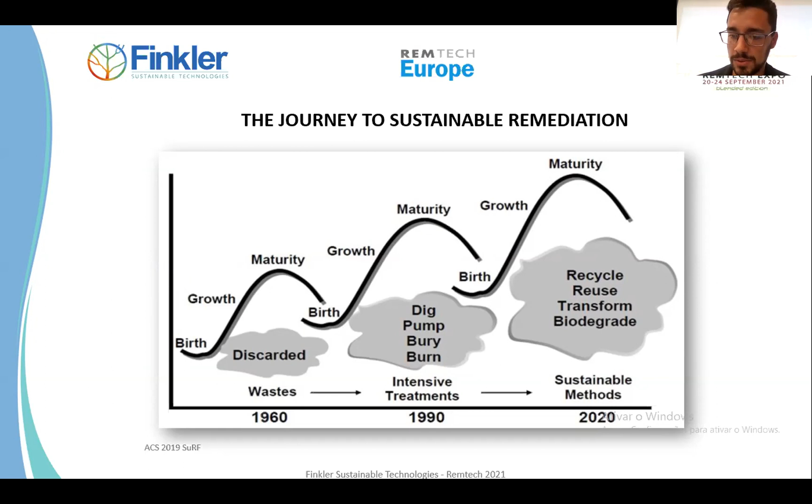Then we started by digging, pumping, burying, and although we would actually eliminate the contamination, we realized that the waste of energy use and the emissions of greenhouse gases were too much. So we had to develop sustainable methods, meaning applying more recycling, reuse, transforming, and biodegrading to the remediation.

So how is it applied nowadays? We have ISO 18504 from 2017, we have SURF from UK, US, Australia, New Zealand, Nicole. But what do all those guides, metrics, and methodologies have in common? They all say that in order to achieve sustainable remediation, you must consider three aspects: the economic, the environmental, and the social one.

Here's an example from SURF UK, where we have many parameters to be evaluated. If we take the first one, air emissions, we can apply a quantitative metric, the CO2 emissions. In the first economic one, we can actually see the value, the money, so the direct economic costs. Those are two examples of quantitative metrics applied to sustainability.

But in general, what all the guides and methodologies have is that they say we should have a subjective and qualitative approach to the project. That's because each project has its own characteristics, each site has its own perspectives, each country has its own legislations, each client has its own needs. So you're not able to apply a fixed rule to every project. In each case, the people responsible for the project should select the metrics and factors that are applicable to that case.

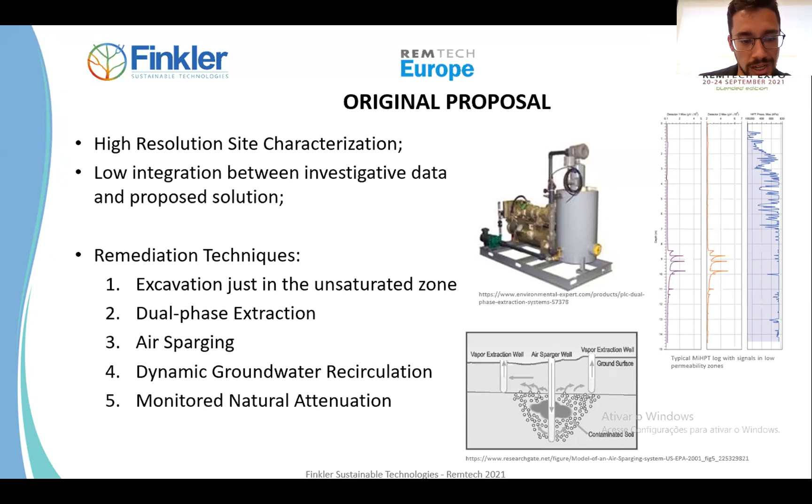Here is our approach to the problem. We decided to intensify the high resolution technology investigation. Through that, we were able to better identify the center of mass of the contamination, and by some estimates, we realized that around 98% of the mass of contaminant was located in the center of the mass. Therefore, if we focus our excavation on these spots, we're going to excavate less than if we only focused on the unsaturated zone.

So by excavating both the unsaturated and saturated zone, but with the knowledge of the exact location and how this contamination is distributed, we're going to remove a higher amount of contamination, and this way we're going to end the secondary source of contamination.

Our second stage is to promote biostimulation with soil mixing and chemical oxidation in order to deal with this 2% of contamination that is left. Since we don't have a second source of contamination that is always feeding this rest of contamination, we're not going to increase the amount—we're always diminishing the amount of contaminant in the soil. In addition, we're going to use a biopile to remediate the excavated soil.

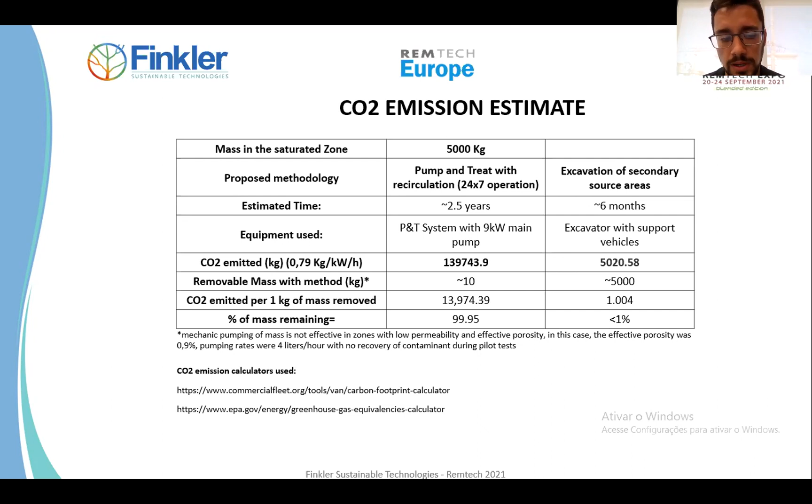When we bring this to the reality of sustainable management and the approaches the guides propose, we can easily sustain that it is not possible to manage if you're not completely sure how your contamination is distributed, how your soil will determine the distribution and movement of this mass. So the data must be all connected and interpreted in order to better evaluate the best approach.

As this case study shows, the most intrusive methods might not be the ones with the biggest impact. That's because if you consider the entire life cycle of the project, the effectiveness of the remediation is way higher even if you emit CO2, in some cases a high quantity of CO2 in just a short period of time. Because if you take the long term, the estimation of 2.5 years is definitely not going to happen—it will be 15 years, or maybe 100, and the total CO2 emission would go really high.

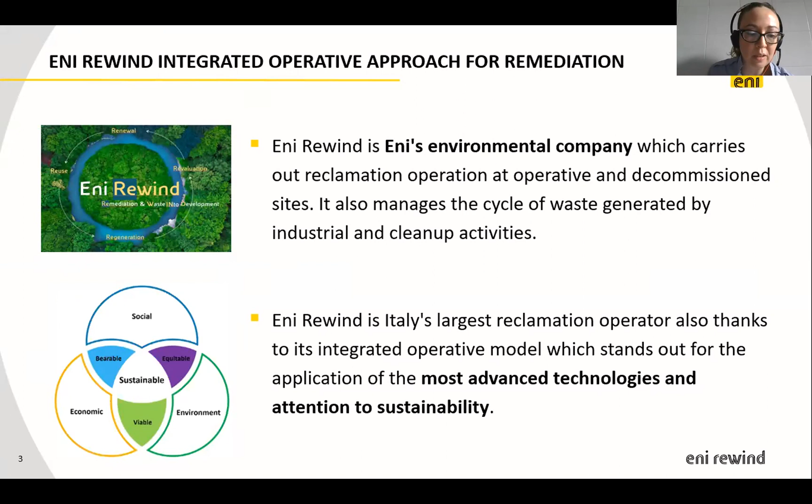About the comparative study, the scope was benchmarking the regulatory and technical approach to identify international best practice in order to improve the efficiency of site cleanup. Four study areas were considered: regulatory framework, applied remediation technology, remediation sustainability, and time and cost.

Now I give the floor to Mrs. Razzetti, from Stantec, and she will present the outcomes of this benchmark study.

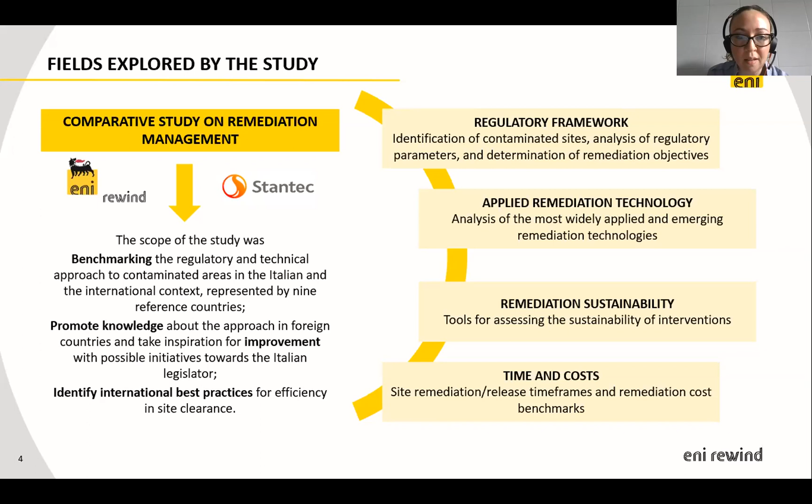Thank you, Silvia. Hi, everyone. My name is Cecilia Razzetti. I'm an environmental engineer and senior consultant at Stantec, and I will talk today as consultant of ENI and consultant of Silvia, of course.

A few words about the working methodology of our study. The study was based on a benchmark between 10 countries. We worked on the first phase of data collection among these 10 countries, and then we proceeded with data analysis. The data were collected through the consultation of international literature, the consultation of public reports prepared by sector players.

Legislators, and public agencies in charge of the management of contaminated sites. We also had the opportunity to interview a number of European agency officials and industry professionals in the countries that we surveyed. Next slide, please.

In all the countries we surveyed, contaminated sites are identified from a list of potentially contaminated sites. This list is the first element to size up the problem of brownfields in a specific country. We started with the analysis of the regulatory framework of the different countries.

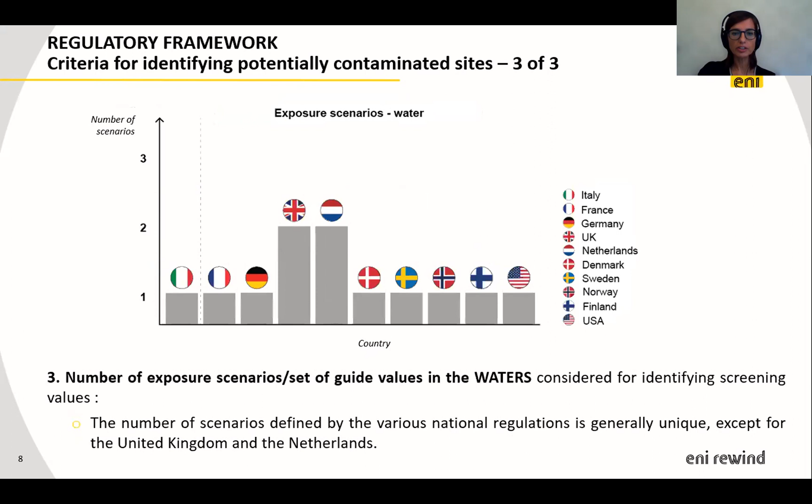Another very important element of comparison is how risk analysis is carried out in the different frameworks. Everywhere in our sample, a remediation procedure is started against the occurrence of a risk. So the mathematical models for calculating the risk are very critical and they're not identical, which introduces further differences between the countries.

We have tried to establish a ranking between the countries, considering very specific elements of the mathematical model, such as the degree of site specificity of the risk analysis—whether it's a level 1, level 2, or level 3 risk assessment. We have also considered the incremental toxic and carcinogenic risk considered acceptable by the models, the inhalation rate, the exposure factor, and the location of the water compliance point. These are all very specific mathematical aspects of the model.

Considering all these factors, we came to the conclusion that Italy is the most conservative country also in the application of the risk assessment. Next slide, please.

Another part of the benchmarking study is about the statistical application of remediation technologies in our sample. We compared the most widely adopted soil and groundwater remediation technologies. The quality and way of reporting data is very diverse among countries, so to make comparison, we grouped the technologies into 3 families: ex situ on-site technology entailing soil excavation, in situ technologies, and a third family we called receptor control or monitoring technologies, referred to in US EPA language as institutional control.

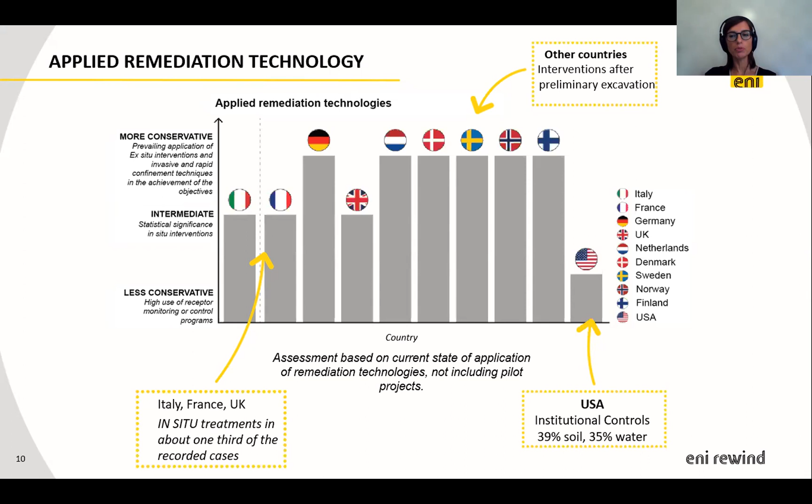We grouped the technologies into these 3 families and made our statistical and percentage calculations. We found that Italy, France, and the UK are in a mid position, as they use a good percentage of in situ technologies. Most other countries still rely a lot on excavation for site reclamation. The US stands out because they use a lot of monitoring and receptor control techniques to reduce the site burden. It's a sort of non-action technology, but they manage to keep using the site under these controlled conditions.

Next slide, please. The next point is sustainability. This has been a big topic in recent years. We tried to understand whether, in the regulatory framework of different countries, there are sustainability guidelines or methods to calculate the performance of remediation projects with respect to sustainability, and to rank and compare alternative solutions. We found a diverse situation.

In some countries there are very specific guidelines that include all aspects of sustainability—economic, environmental, and social—and they even use quantitative methods, so they can rank alternative options in terms of sustainability and demonstrate how they calculated that ranking. In other cases there are only qualitative tools, or they're not mandatory, or they consider only one aspect, usually the environmental aspect. The only country with no guideline for sustainability is Italy. We do have elements in legislation that call for consideration of sustainability, but we do not have codified procedures to evaluate projects based on sustainability parameters.

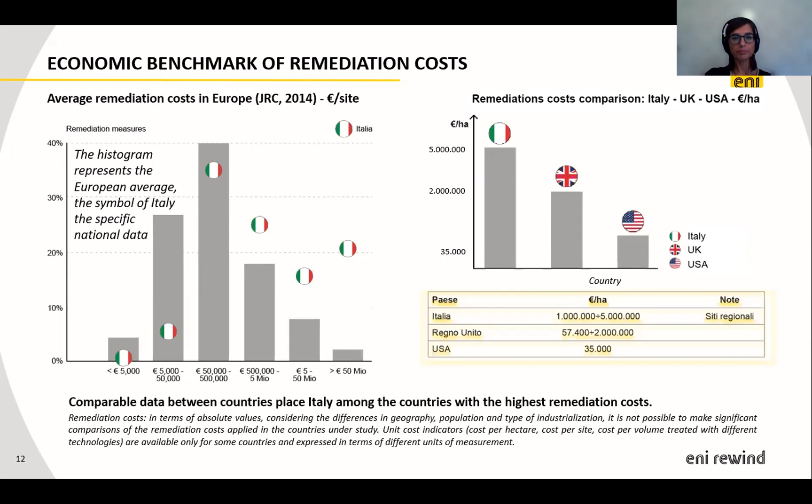Next, please. This was a very quick overview of this benchmarking study. The outcomes show that our national situation is more conservative than other countries for many criteria. We have strict screening criteria for identifying potentially contaminated sites, a larger number of mandatory quality parameters for soil and groundwater, a compliance point for groundwater at the site boundary, and no codified sustainability assessment procedure. We bear, on average, higher remediation costs, and we do not have plans to define priorities for intervention in a portfolio of sites.

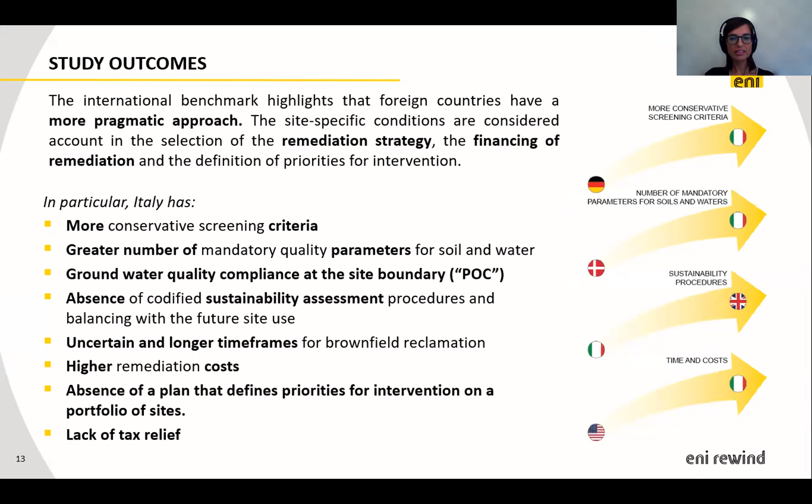Maybe Silvia, you want to add something at the end of the presentation? Okay, I'll leave the stage to Silvia.

Eni Rewind is involved in developing passive sampling methodologies to define the mobile fraction of contaminants, and currently this methodology is undergoing field tests with ISPRA, the Italian Institute for Environmental Protection and Research. About bioavailability and biodiversity, we have developed an ecological risk assessment guideline, and in this session there will be a specific speech on this topic.

About circular economy, we operate using technologies and processes that reduce the production of waste, the consumption of materials and energy, and we work to recover and reuse more resources. Finally, sustainability: Eni Rewind is integrating sustainability into contaminated site management, developing different tools—a tool to evaluate the sustainability of a remediation strategy, a simplified tool to assess remediation technology by life cycle assessment, a cost-benefit analysis procedure to estimate the net present value of complex remediation strategies, and we plan our remediation projects considering the future site reuse.

Let's jump into the next presentation, where Kevin Kuntze will present how to find the most convenient remediation strategy at a former industrial site. Kevin is the lab manager and innovation expert at Isodetect, a German company offering isotope analytical services and scientific experience to stakeholders in groundwater remediation. Kevin, I would say the floor is yours.

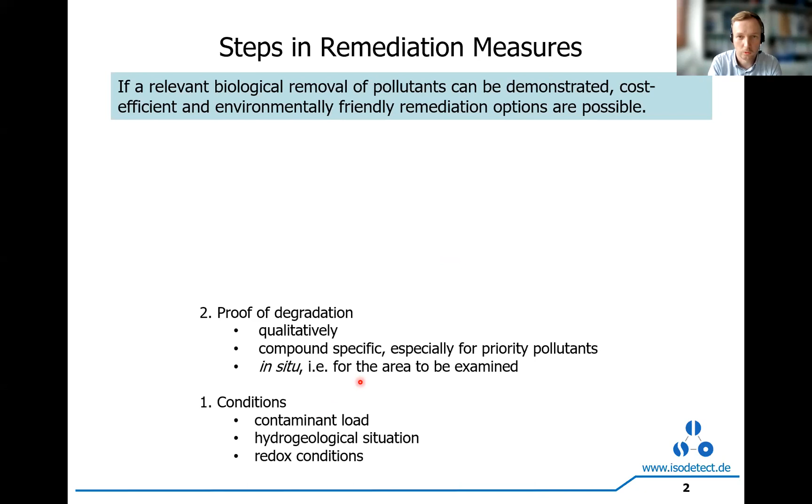So you have to examine the area where the hot zones of biodegradation are taking place. As a third step, if possible, quantify the degradation.

Most importantly, do calculations on the field site models, the numeric model, and the plume development—how it looks in 15, 20, 30, 50 years—to see if biodegradation is really a sustainable remediation option.

And in the quantification, you can calculate degradation rate constants. Nevertheless, maybe there are options to stimulate these biodegradation processes, so identify stimulating or inhibiting processes at the field site in situ, and determine stimulants that possibly can be added to the field site.

To enhance the natural attenuation processes. As you can see, with the further steps in these remediation measures, the complexity of this investigation increases, so we need advanced monitoring tools applied, most importantly, in parallel.

This is the case of a multiple line of evidence approach in the early stage of site characterization. The advantage of such an approach is the mutual validation, using the advantages of each method to have a well-founded site characterization. So what are those advanced monitoring tools for remediation methods?

You have qualitative tools like metabolite analysis, analyzing transformation products and intermediates within the degradation processes directly in situ. This proves that biodegradation is going on—otherwise you wouldn't find such intermediates.

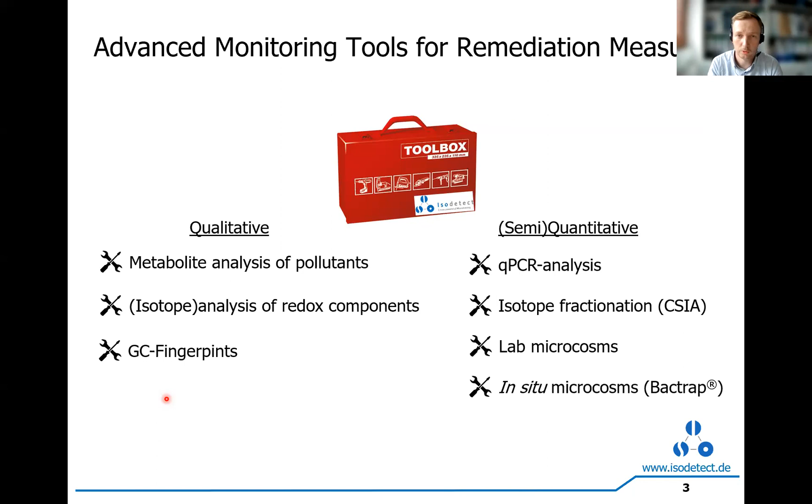I want to focus now on these three methods in the semi-quantitative tool with the example of a former industrial site in Germany. The site was contaminated mainly by chlorinated volatile organic compounds—mainly PCE (tetrachloroethene), TCE (trichloroethene), DCE, and vinyl chloride—with slight contamination by BTEX and PAHs.

At this field site, we have potentially several sources of contamination and general anoxic conditions. So reductive dechlorination is supposed to be the main process in biodegradation of the chlorinated ethenes, in which microorganisms use the chlorinated ethenes as a terminal electron acceptor in their respiratory chain.

With each step, a chlorine atom is exchanged with a hydrogen, giving a degradation pathway from PCE to TCE to DCE to vinyl chloride, and most importantly, to ethene—the non-toxic product of this complete degradation.

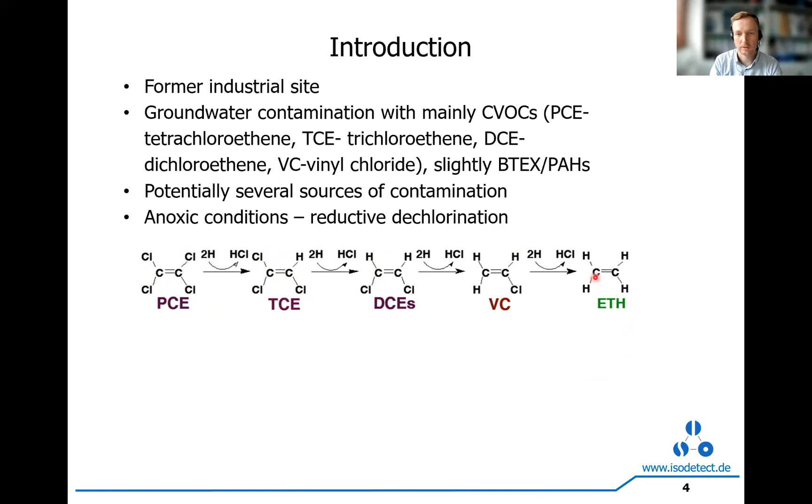So the aim of this multiple line of evidence approach, or this investigation, was to determine if complete pollutant degradation processes are already going on and active at the field site.

We also wanted to evaluate if different remediation scenarios are possible—monitored natural attenuation, or maybe the possibility to enhance natural attenuation processes—and how the contaminant plume will develop in the future.

You can see the field site here with the PCE and TCE load, and here in the north you'll see this area, which is a lake—an area that has to be protected from the contaminant load.

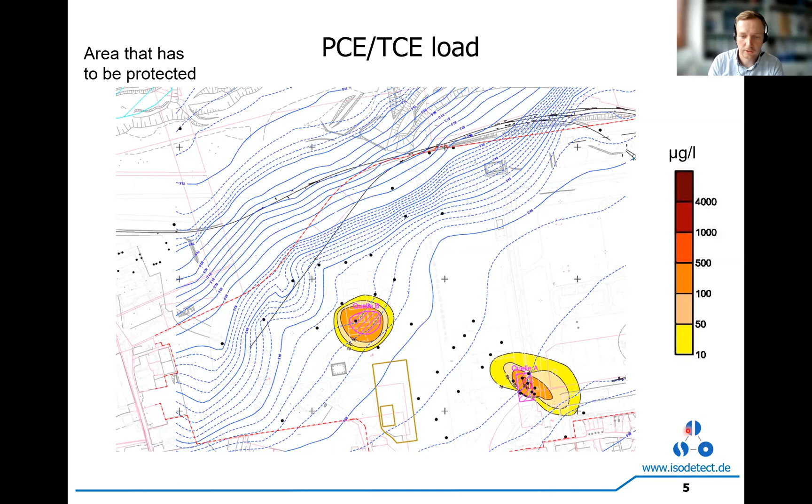The PCE and TCE load at this field site was up to 500 to 1000 micrograms per liter, and as you can see, we have potentially two sources of contamination at this industrial field site.

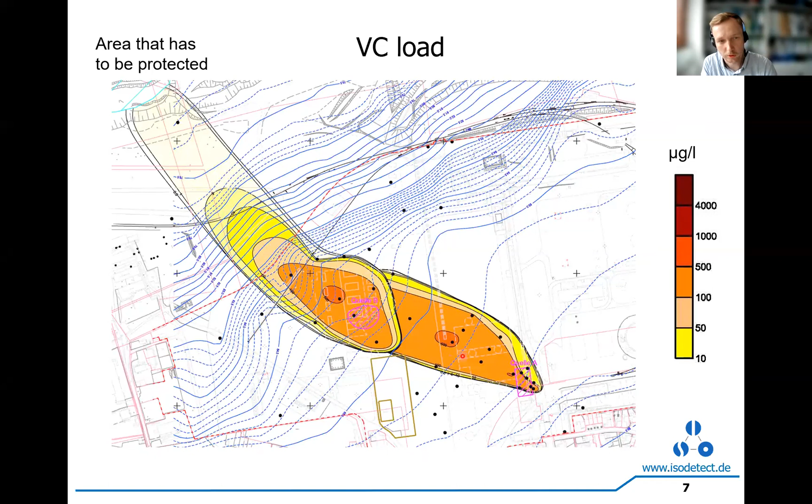So we want to investigate the pollutant degradation processes actively at the field site. And the first step, by QPCR analysis, you are extracting DNA, and as you all know, DNA is the carrier of the genetic information. With QPCR analysis, you're targeting either functional genes, and these functional genes are encoding enzymes, so proteins that are catalyzing certain degradation processes.

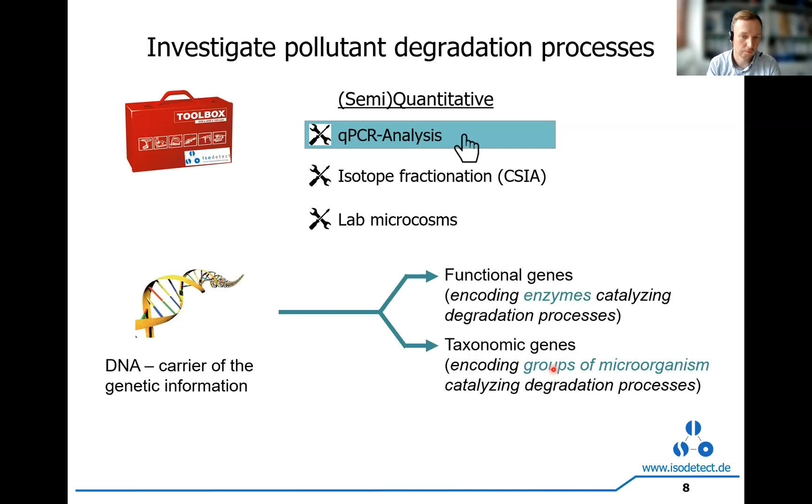In our case, it will be the enzymes catalyzing the steps in the reductive dechlorination. Or, as an addition, you can also target taxonomic genes. So those genes are encoding groups of microorganisms that are known to catalyze certain degradation processes, so specialized microorganisms, for example, catalyzing the reductive dechlorination.

So we extracted DNA from several sediment samples. First of all, the first potential source zone, the source zone 1 and 2 filter section, you see that we detected genes of a special group, so-called Dehalococcoides. Dehalococcoides are one of the most important groups of microorganisms that are able to degrade completely PCE and TCE to ethene as a non-toxic product.

So with the detection of this special group of microorganisms, we already proved that the degradation of the chlorinated ethenes is going on. As an addition, we also detected a special gene encoding an enzyme catalyzing the last most important step, from the highly toxic vinyl chloride to ethene, with the vinyl chloride reductase. We didn't detect any BTEX degraders or aerobic chlorinated ethene degraders in source zone 1.

In the second source, in both filter sections, we additionally also detected Dehalococcoides. We didn't detect the function gene of the vinyl chloride reductase, maybe a hint that vinyl chloride degradation is limited at this place or situation. But nevertheless, we detected the Dehalococcoides, a special group of reductive dechlorinators.

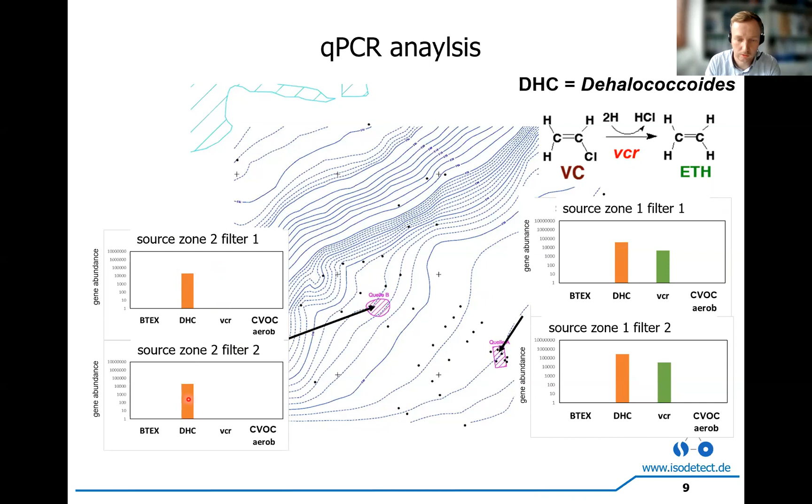So we already have a first proof that the biodegradation of chlorinated ethenes is taking place at this second source zone. Further downstream, we didn't detect any Dehalococcoides or vinyl chloride reductase or others. So there's really the question if in these further downstream groundwater wells there is no biodegradation of chlorinated ethenes going on. So with a second method, with isotope fractionation, we investigated how far the compound-specific degradation processes are going on and tried to calculate those degradation processes.

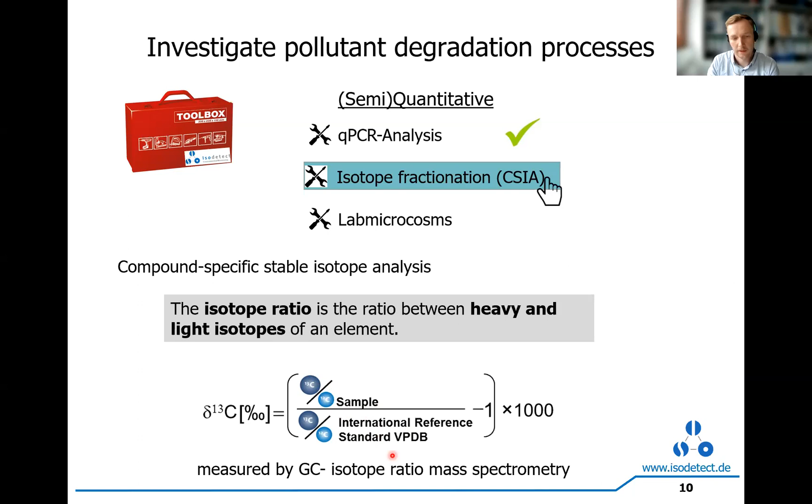The compound-specific stable isotope analysis is analyzing the isotopic ratio, and this ratio is the ratio between the heavy and the light isotope. Certain elements have different isotopes, so we have a stable isotope. In the example of carbon, you can see here we have a heavy isotope, which has one neutron more than the light isotope, and we are analyzing the ratio of this isotope with respect to an international standard. You have a natural abundance of these two different isotopes, the light and the heavier ones.

And the basis of isotope fractionation is that pollutant molecules with a heavy isotope in the molecule are degraded more slowly and accumulate in the remaining pollutant fraction. The reason for this is that the activation energy in the bond breakage, if there's a heavy and a light isotope, is higher than if it's only two light isotopes.

So in consequence, with the degradation of the contaminant, all the molecules that have a heavy isotope in the molecule are still remaining in the pool. So the ratio of the 13C to the 12C in the remaining pool is increasing due to the further degradation of the contaminant. So the isotope ratio is shifting towards more positive isotope values, as you can see here, from around -30 to -25 per mil.

So what was the takeaway, the take-home message? In case of degradation, just remember isotope values are getting more positive.

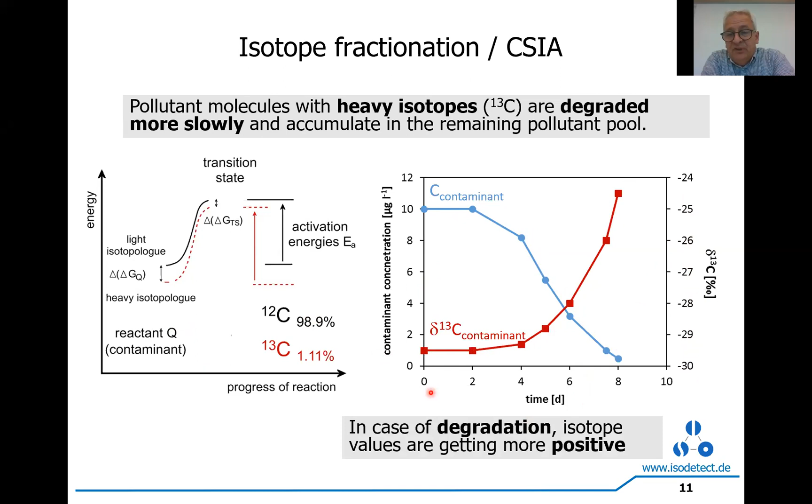We have one more minute left, Kevin. Okay, we have to. Okay, so yeah.

Okay, thank you. So we investigated different groundwater wells and we investigated the isotope values. As you can see here in source one, we have some isotope values of about -18, -16 per mil, and further downstream we have a shift towards more positive isotope values. This is already proof that degradation is going on along the groundwater flow path.

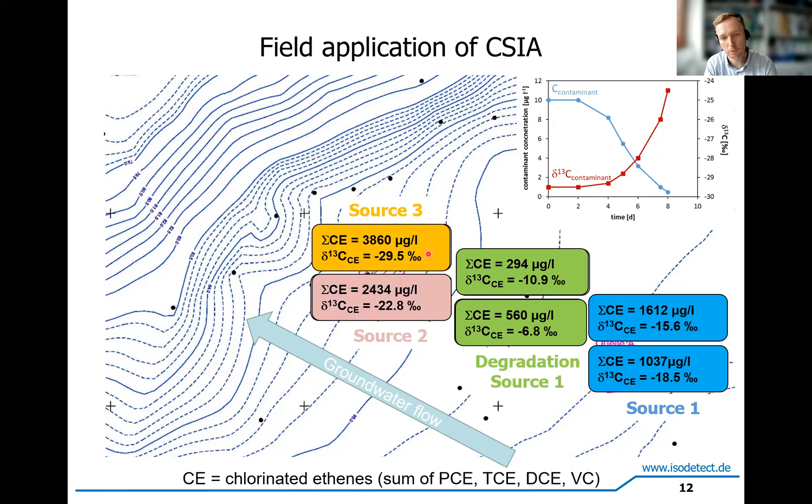Further on, when reaching the second potential source of contamination, we have then a shift again to more negative isotope values. A shift to more negative isotope values is not possible due to degradation or any other processes. That's why we have proof that we already have two additional secondary sources at this field site. Further, we have again a shift towards more positive isotope values, as you can see, from -23 to around -6, -15 per mil, whatever.

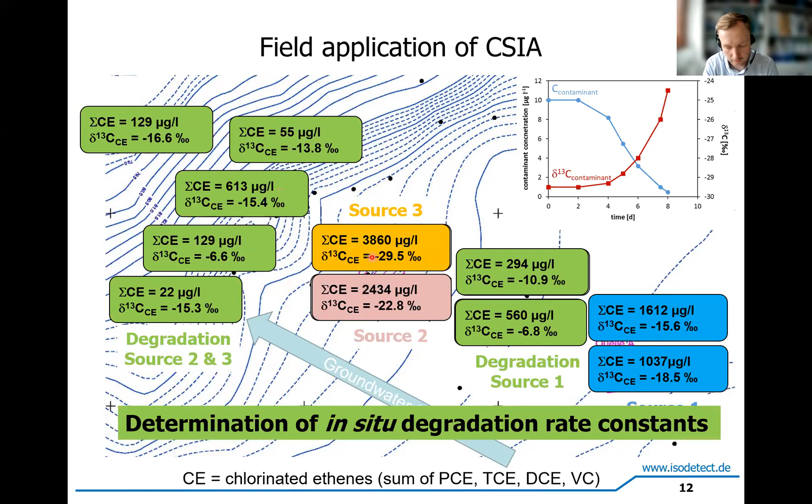But with this, we have proof of degradation from this second source that the chlorinated compounds are degraded. And with these shifts in the isotope value, we can determine and quantify first order degradation rate constants, and calculate forecasts of the development of the plume.

As you can see, with a forecast without any remediation, after 50 years you will see that the PCE, TCE, and DCE will be completely degraded. However, the vinyl chloride will still be present at 10 to 50 microgram per liter and is already reaching the area that has to be protected.

That's why we additionally investigated if there may be some stimulating effects possible. And we investigated this by lab microcosms. These were special cases of lab microcosms because here we added 13C labels.

So only microcosms with copollutants that are labeled with 13C, chemically labeled. The advantage of this is when you add this to your microcosms and they are degraded by the microorganisms, you will see it in the end products, in the mineralization product, here in this case CO2. And when you have a shift in this isotopic ratio of the CO2, you have a highly sensitive proof that degradation is going on.

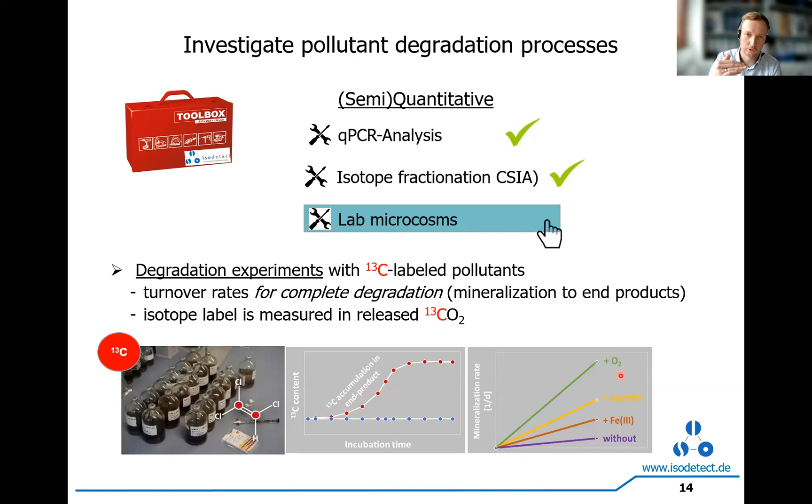You can really do different lab microcosm setups, adding oxygen, lactate, iron, whatever you prefer, and then compare them to each other. You can calculate mineralization rates.

With this, we have real proof that the addition of oxygen is a possible enhancement remediation option. We can calculate the first order mineralization rates and implement it in our field site model.

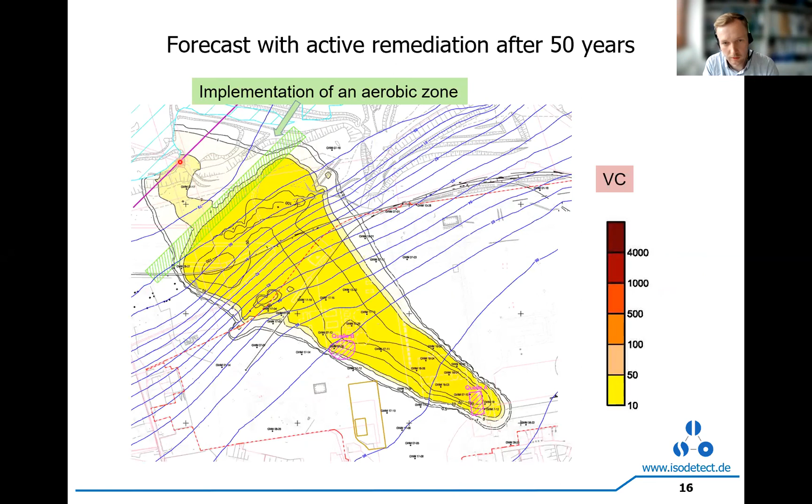In summary, we detected, just shortly, three distinct sources by compound-specific stable isotope analysis, and also sustainable natural pollutant degradation processes. We determined degradation rate constants, and in order to assess the effectiveness of a possible aerobic treatment, we investigated this by 13C microcosm studies.

With the help of these model calculations, site-specific remediation scenarios, monitored natural attenuation, as well as enhanced natural attenuation scenarios were possible.

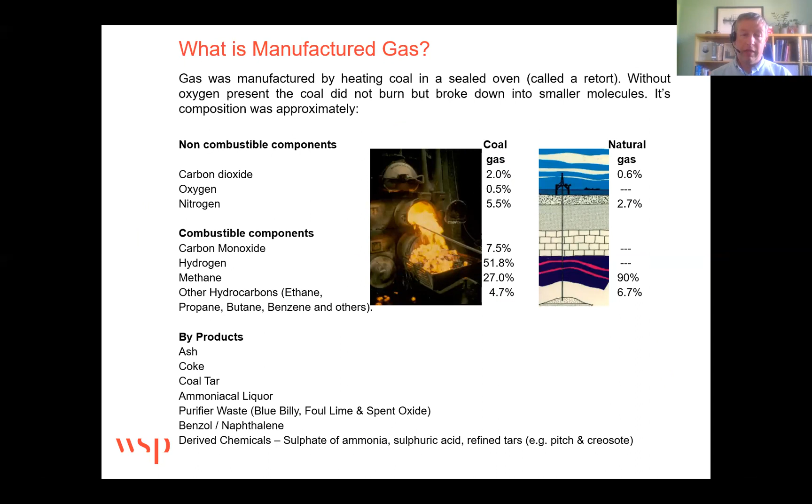So if we go back to what manufactured gas is, it's very different to the natural gas which we use today. The main difference was that the gas was primarily hydrogen, carbon monoxide, and methane, whereas the natural gas we have today is primarily methane. The gas manufacture process also produced a lot of byproducts, so coal tar, ammoniacal liquor, and purifier wastes. I'll talk a bit more about coal tar in my presentation.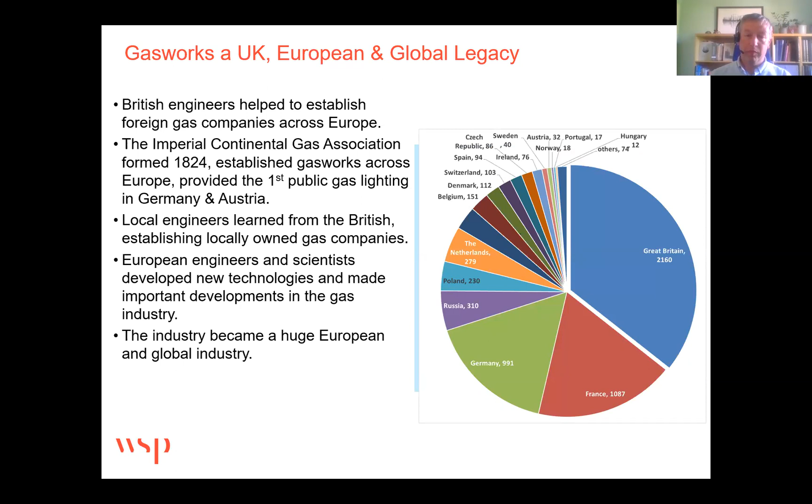There's a lot of information available on these former companies. The Tuscan Gas Company was one British company which operated a number of gasworks across Italy, and there are also other British-owned companies that owned gasworks across South America. There were gasworks across what was the former British Empire, so Australia, Canada, New Zealand, all adopted the same technologies that were developed in Britain. Countries such as Japan adopted initially European technologies to develop considerable gas industries. So apart from Antarctica, there was gasworks in every continent in substantial numbers.

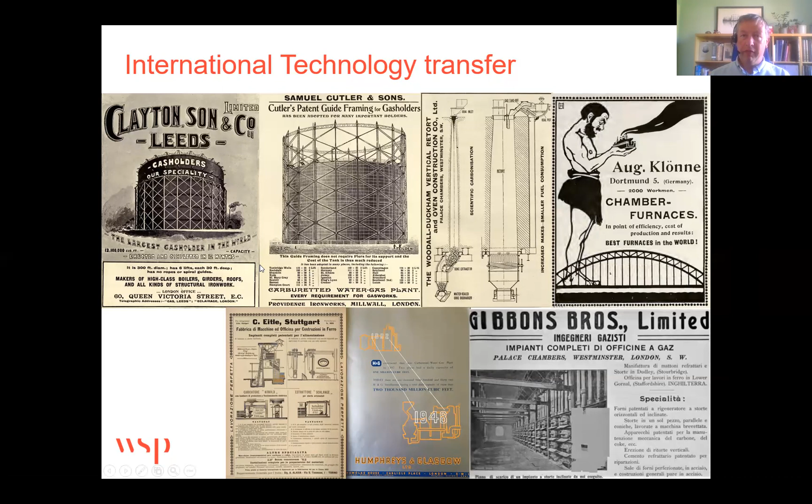In France, the inclined retort was developed, which gave a slightly different thermal gradient across the retort when it was heated, and that used gravity to help move the coal. From Germany, the vertical retort was first developed, which was then further adapted in the UK.

In America, they developed a method of making gas very quickly called water gas, which could then be enhanced by injecting oil into the carburetor in the system, making a totally different form of tar to what you find from the coal-based processes. Then from the continent - France, Germany and Belgium - the byproduct coke oven was developed, which was a way of making primarily coke, but the byproduct was gas, which was used to supply a lot of domestic gas networks, and also the coal tar was produced there.

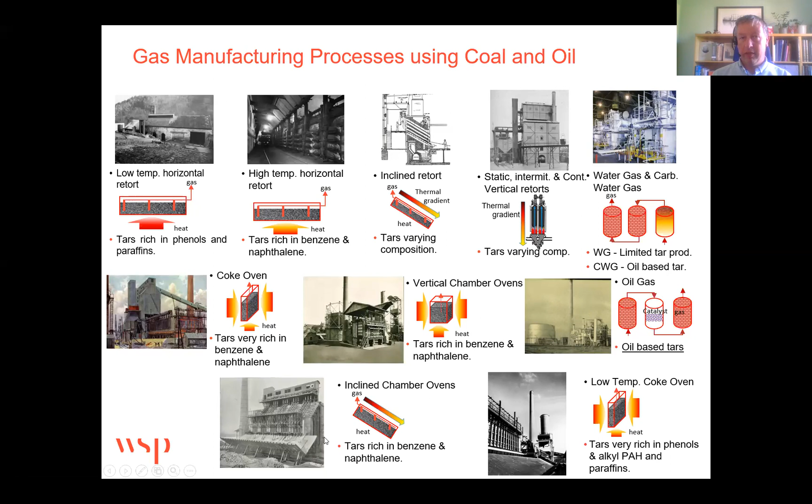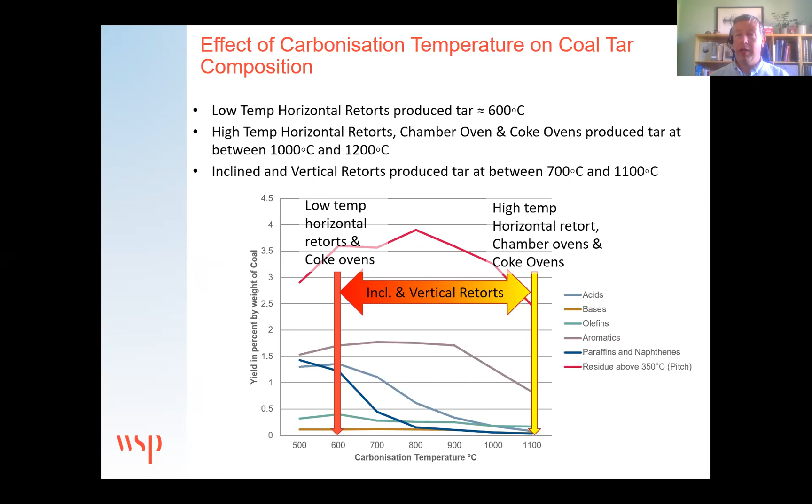More importantly, when you're looking at coal tars, which quite often are the main contaminant on the gasworks, this same effect of heating also affects the composition of the tars that you may be deriving. An increase in temperature decreases the volume of tars, but it does so in a way that removes most temperature-sensitive substances such as paraffins, naphthenes, and olefins, and some phenols as well, predominantly leading to things such as PAHs, which are more stable.

The study we did at the University of Strathclyde involved collecting a number of coal tars from sites across the UK and some from Europe and the USA, where we had knowledge of the site's previous use and operations. We could correspond that when we analysed the samples using two-dimensional gas chromatography with time of flight mass spectrometry, that the actual samples can be grouped using principal component analysis.

The analysis is relative to their level of thermal degradation. So coke ovens plot at the highest, and the vertical retorts, which have a slightly different signature because they have both high and very low thermal degradation across the retort and the vertical plane, plot at the bottom. And as you may expect, the oil signatures of carbureted water gas or creosote plot quite differently.

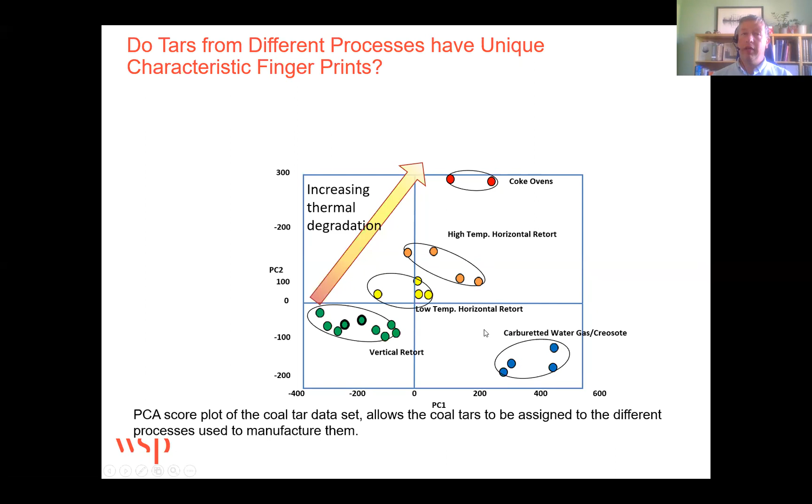This research also showed that there were 2,369 individual components we could detect within the coal tar, but only 173 of these were common compounds found in all of them. You can see here marked in red are the US EPA 16 PAHs. Those in yellow are the US EPA 32 PAHs. And those shaded in purple, blue and green are the nitrogen, oxygen and sulfur heterocycles that you find in PAHs.

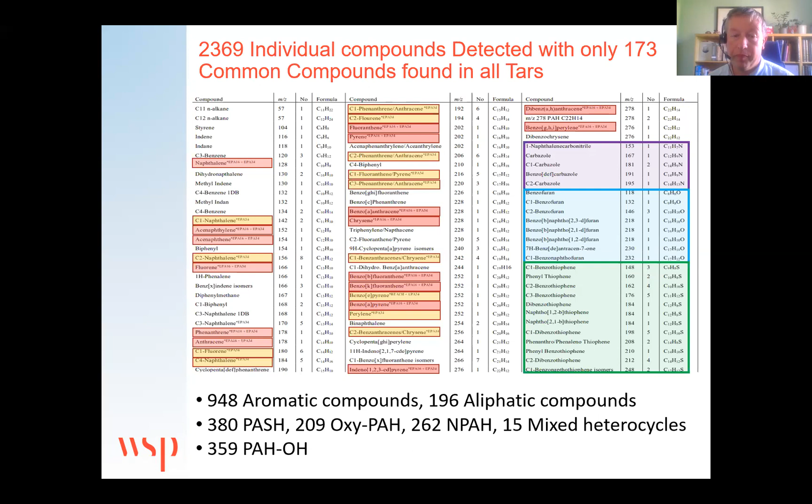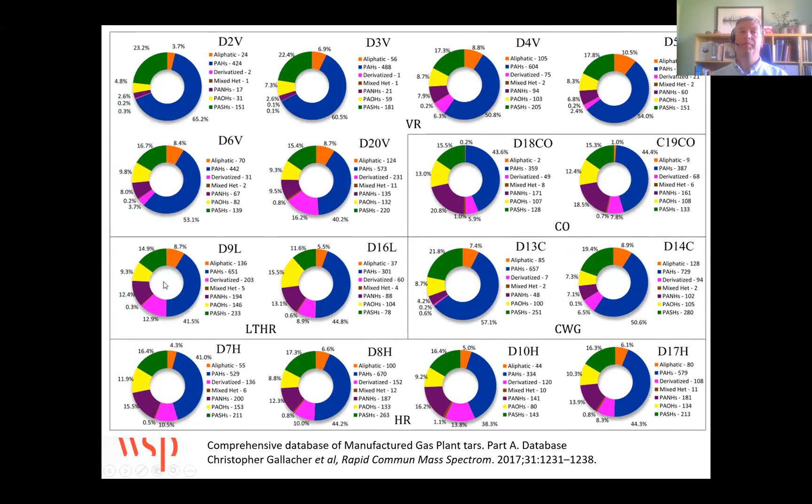Some of the implications of this work that we did were that typical analysis and risk assessment for PAHs is primarily based on BAP, but there are many alkylated PAHs, nitrogen, sulfur, and oxygen heterocycles present in tars that we don't typically look at.

And could you finalize in one minute? Okay, yeah, time flies.

You can find coal tars in many forms. You can find them mixed in soils with tanks, dehydrated with ash on site, or free phase either in tanks or within the ground, strata, or trapped in rocks.

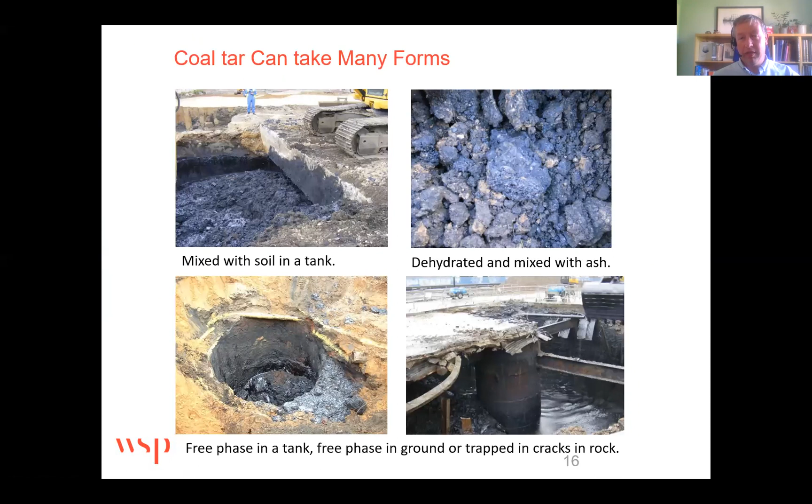This is what you would expect to see with a carbureted water gas tar. This is a much more mobile LNAPL, able to move in with the water table. It's very different to what we typically expect on gasworks, where you have the DNAPL that sinks to the bottom of the aquiclude, and there's limited horizontal migration except for diffusion.

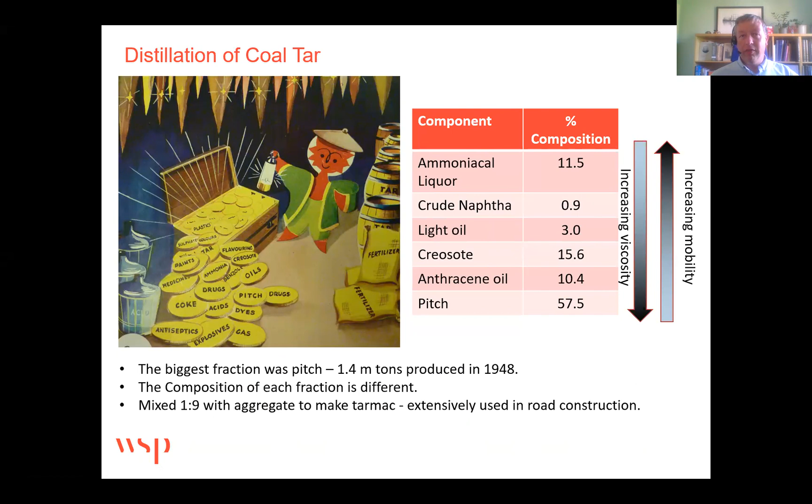Another point: you can refine coal tars, you can distill them, and if you distill them, the coal tars on the site that had a chemical works will have totally different properties than the pure coal tar. So you have to be careful that they may be quite different.

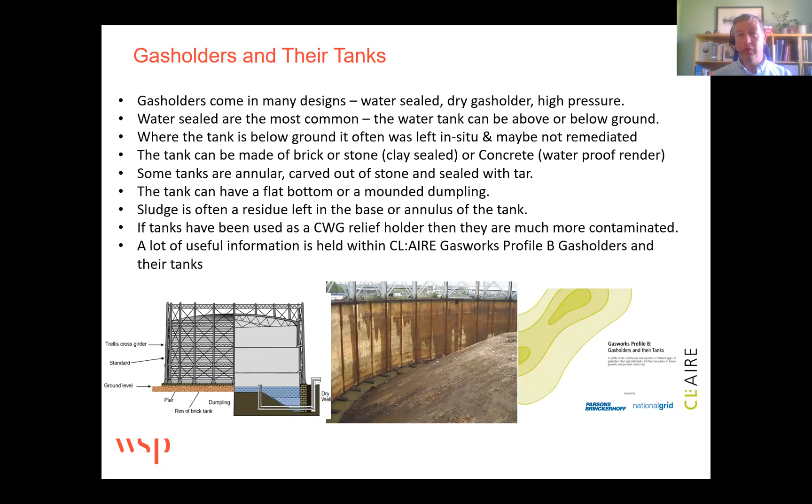There's a useful document on the CL:AIRE website that's got a lot of details about gas holders. And then just finally, as I mentioned, gasworks is one of the original industries. I carried out a study for Historic England where we investigated over 3,600 sites to find out about their history and their surviving state.

As part of our job as contaminated land professionals, we do have the ability to identify important industrial sites and be able to advise about how we can bring these back into beneficial reuse, rather than just saying the cost of preserving the heritage is too much and flattening them. So it's worth remembering. I'll finish there. Thank you, sorry for going slightly over.

Thank you very much for your always interesting presentations on gasworks and the history of gasworks. It's tremendous what you have in your experience and in your brain, I would say, from all the history of these gasworks. We will now go to the next presentation on contaminated sites prioritization in the Republic of Serbia.

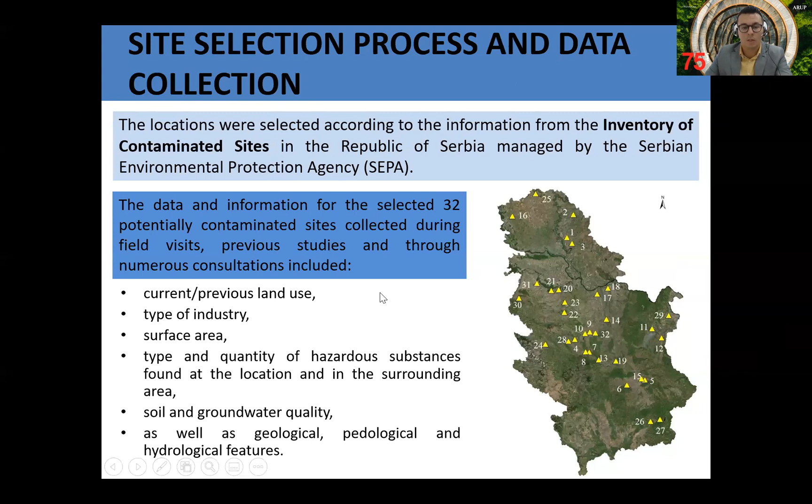As I said, in 2016 we went through these 37 locations, and on 32 we took soil samples. The next year, in 2017, 264 soil samples were analyzed. The most important thing from the first site visits was that we found the source of pollution, potential receptors of pollution, and potential exposure routes of that pollution. After that, we prepared programs and strategies for soil sampling.

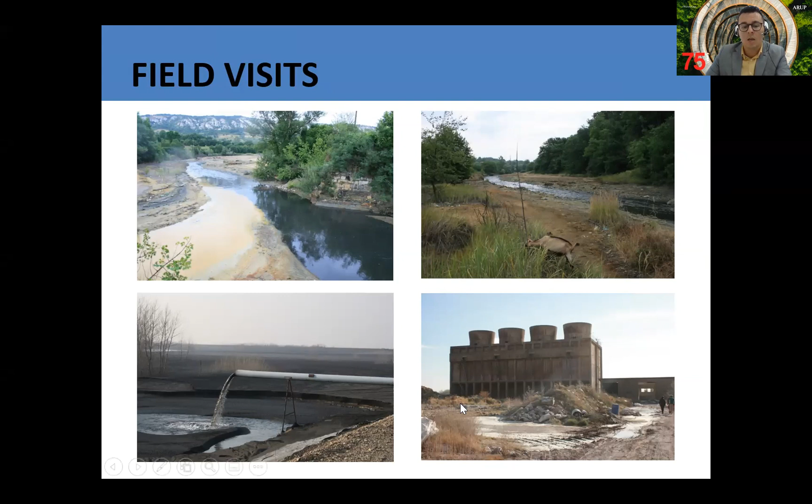The other photos are from different locations we visited. Some of them are abandoned, like this one location, but this other location is still working.

It's important to mention that we used an XRF portable device, with help from our colleagues from Italy. By using this portable device, we reduced the number of soil samples taken the next year, because we focused mainly on where most of the contamination was located.

I'd like to mention that one of the outcomes of this project was also development of a Cadastre of contaminated sites. The Cadastre is now maintained by the Serbian Environmental Protection Agency, and the idea was that all information about potentially contaminated sites in Serbia would be filled into this database by local self-governments or municipalities. We also included these 32 locations where we conducted surveys.

It's important to note that you can enter different levels of information in this cadastre. For example, for some locations you can enter just location, name, type of industry, and geographical coordinates - that's it, if no survey has been conducted on that area.

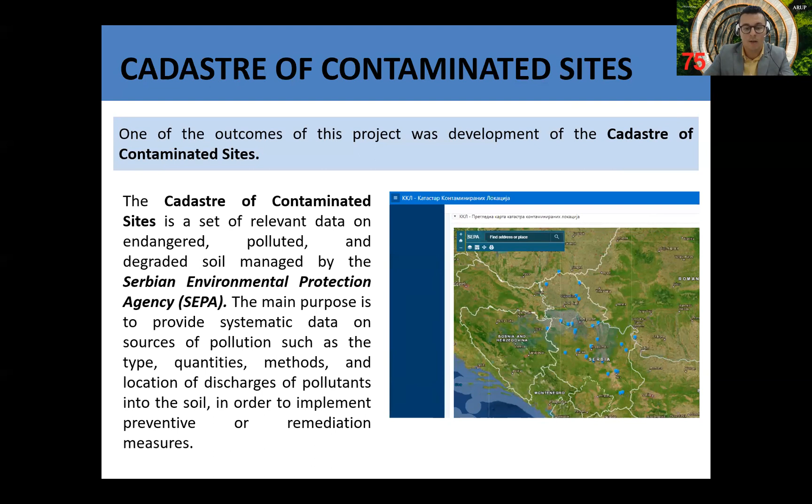Now my colleague Lana will tell you more about site prioritization. Good afternoon, I'm Lana Kukobat, and I will take over from here to present the next phase of this study, which includes the site prioritization.

According to all the data we collected during the site investigation process, we systematized it and established several criteria for site prioritization, the first step of site prioritization. These criteria are listed here on this slide. According to them, we divided all 32 locations into 4 groups.

In group 1, we have locations where contaminants did not exceed the remediation values. In groups 2 and 4, we have locations where additional monitoring and more detailed research are proposed at this time - especially for group 4, which covers large industrial enterprises where only certain parts of the complexes require remediation. So our focus group is group 3.

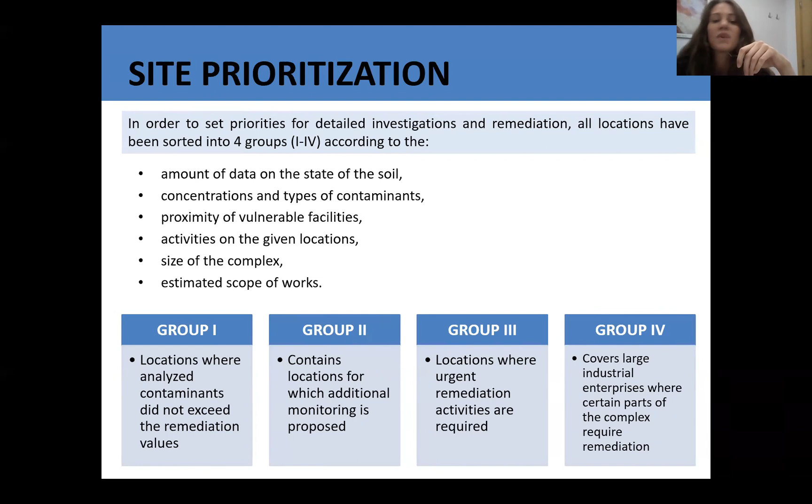After identifying 14 locations with the highest priority for soil remediation programs, we decided to also compare them and prioritize them from the aspect of risk to human health.

So for this purpose, we chose the preliminary risk assessment model for the identification and assessment of problem areas for soil contamination in Europe, in short the PRAMS model or methodology. This methodology was chosen since it was created in 2005 within the EEA's project that aimed to develop a tool that can facilitate the assessment and classification of contaminated sites, and in that manner support national, regional, or local programs for remediation of these sites.

How does it work? For the design of the conceptual site model within this methodology, a paradigm was adopted: source, pathway, and receptor, where source represents contaminated soil or disposed waste, the receptor is human health, and exposure pathways are groundwater, surface water, air, and direct contact.

As for the scoring system, the PRAMS model calculates relative risk according to the scores assigned to the values of the relevant parameters for each location. This model is developed in the Access environment, and from our experience it was a very user-friendly tool. But the most complex part was certainly the collection of required parameters for the Tier 2 rank of the relative risk assessment.

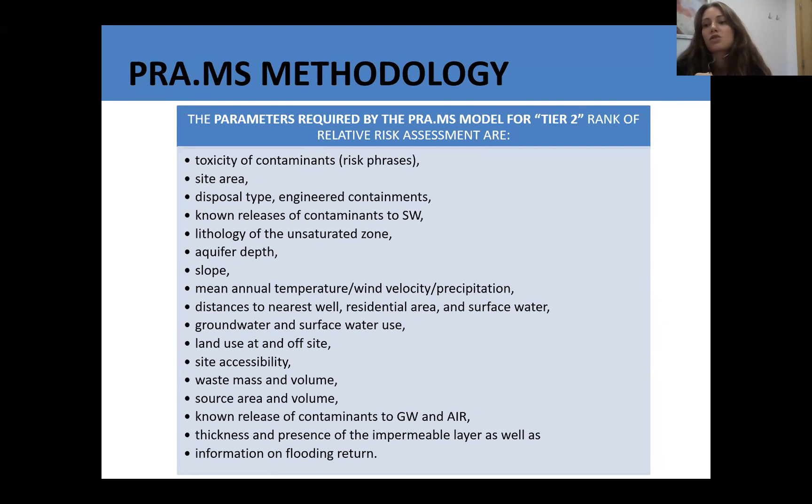Also important to emphasize is that within the PRAMS methodology, the classification of risk values and the uncertainty factor is proposed. According to the classification, out of 14 locations, the first 3 are in the high risk class and the rest are in the medium risk class. As for the uncertainty factor, all of them belong to the low uncertainty factor class, meaning the majority of required parameters were entered and available for calculation.

After applying this methodology to our 14 locations identified with highest priority, we drew several conclusions. The key ones are that this priority list, according to the PRAMS methodology, can be used for the decision-making process and risk-based argumentation for better allocation of available resources for remediation programs.

Also, the application itself opens several possibilities to enhance the management of contaminated sites. Systematization of data and the possibility to identify missing data is especially helpful when we need to compare and assess a larger number of locations.

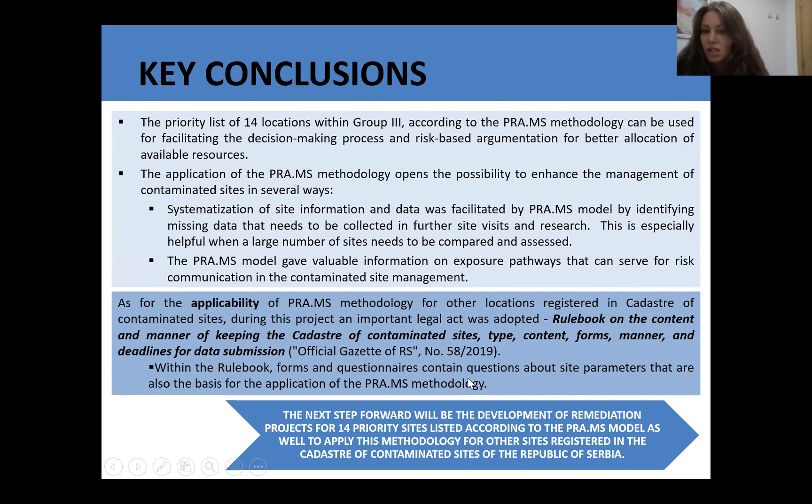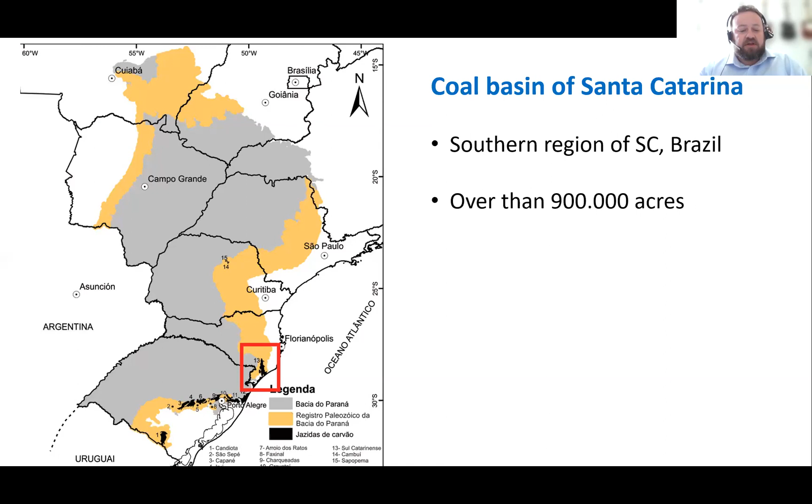It contains a reserve of mineral coal of around 4.3 billion tons, corresponding to 13% of the country's total exploitation. The exploitation occurs mostly in three economically viable coal layers, named Barro Branco, Irapuá, and Bonito, associated with Permian sedimentary successions of the Paraná Basin. Coal mining activities began in the early part of last century and had considerable expansion after the Second World War.

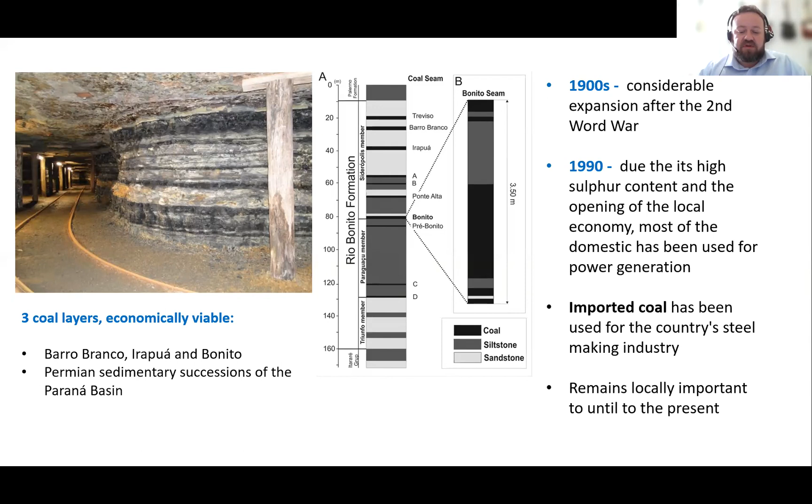It remains locally important to the local economy until the present. Coal production was initially used to generate vapor in ships and as fuel for locomotives, and after the 40s it started to be used primarily in the steel industry. Since the 90s, with higher sulfur content and the opening of the local economy, most domestic coal production in Brazil has been used for power generation at Central Termoelétrica Jorge Lacerda in the city of Capivari de Baixo in Santa Catarina state, while imported coal has also been used for the country's steel-making industry.

Until the early 90s, before privatization of Companhia Siderúrgica Nacional, it owned over 70,000 acres of coal reserves, where it developed large superficial and subsuperficial mining activities, processing units, waste landfills, transportation, and other diverse coal mining related activities. During this period, the Barro Branco and Irapuá formations were exploited, and due to their metallurgical characteristics, the coal was extensively used in the first integrated steel-making plant in Brazil, located in the city of Volta Redonda in Rio de Janeiro state. From 91 to 2000, CSN began a mine closure program across the entire region, where the main assets were sold to third parties.

As a result of this operation, more than 1,210 acres of superficial areas and 2,400 acres of subsuperficial mining areas, divided into 33 units with 46 mine entrances in 7 different municipalities, were officially recognized as contaminated land under the legal responsibility of CSN.

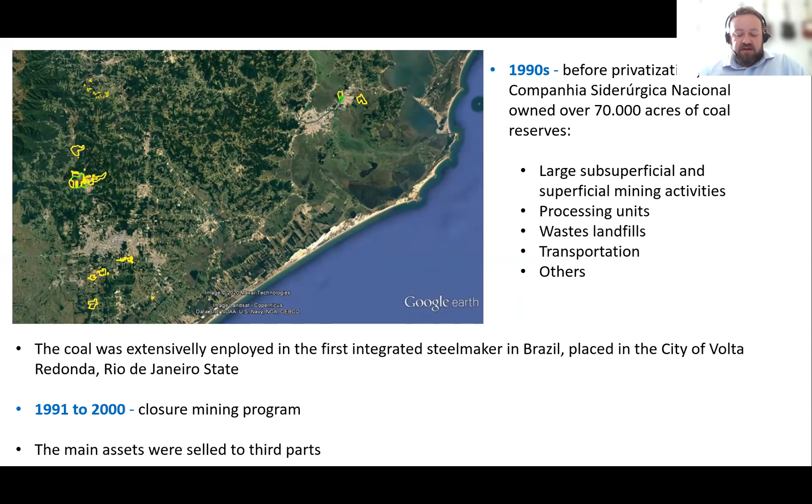Besides CSN, 17 other mining companies had operated in this region during the same period, contributing to the generation of acid mining drainage. In total, this operation resulted in more than 6,000 acres of superficial mined areas and 16,000 acres of subsuperficial mined areas, with 820 abandoned mine entrances identified to the present, resulting in several regional impacts to the environment.

So the main objective of this project was the development of an integrated management strategy model for acid mining drainage contaminated areas under the legal responsibility of CSN, related to historical coal mining activities in Santa Catarina state.

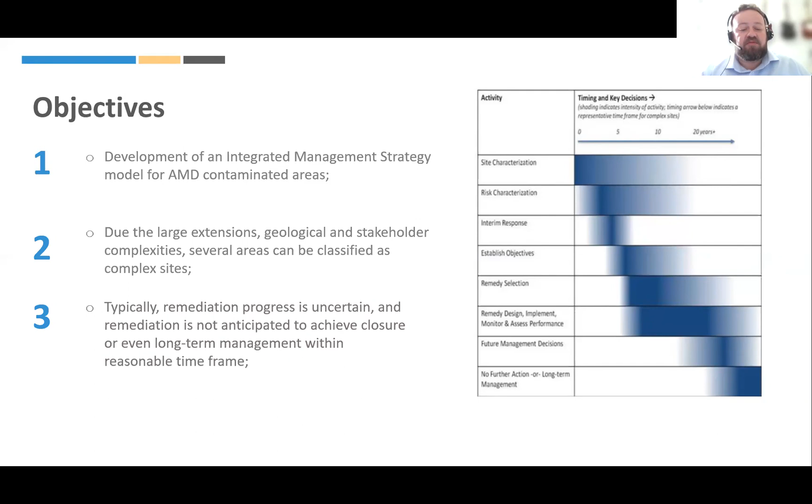Due to factors such as large extension, geological, and stakeholder complexities, several of the areas can be classified as complex sites. Typically, at complex sites, remediation progress is uncertain, and remediation is not anticipated to achieve closure or even long-term management within a reasonable time frame. Both technical and non-technical challenges can limit remediation.

Considering these challenges, it's necessary to employ a concept recommended for managing complex contaminated areas, described by ITRC as adaptive site management. This process is comprehensive, flexible, and iterative, and well suited for sites where there is significant uncertainty in remediation performance prediction.

Adaptive management includes setting short-term interim objectives and long-term site objectives that reflect both technical and non-technical challenges. The remedial approach may involve multiple technologies and changes in technology over time. Comprehensive planning and scheduled evaluation of remedy performance help decision makers track remedial progress and adjust the remedy if needed, to stay on track to achieving short-term interim objectives. Long-term planning can also improve the timeliness of remedy optimization, reevaluation, or transition to other technologies or contingency actions.

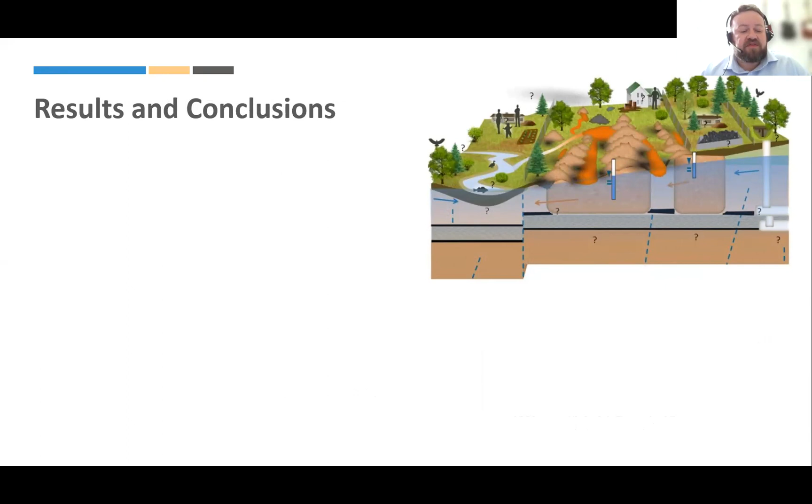As a result, an integrated strategy management for acid mining drainage contaminated areas under legal responsibility of CSN has been developed and evaluated. A key outcome is the recognition that the most advanced global practices for environmental management of mined areas have similarities with strategies employed for management of contaminated areas. This approach is focused on development of robust conceptual site models and quantification of ecological and human health risks, leading to the proposition of intervention plans, with the objective to recover the natural environment in mine degraded areas.

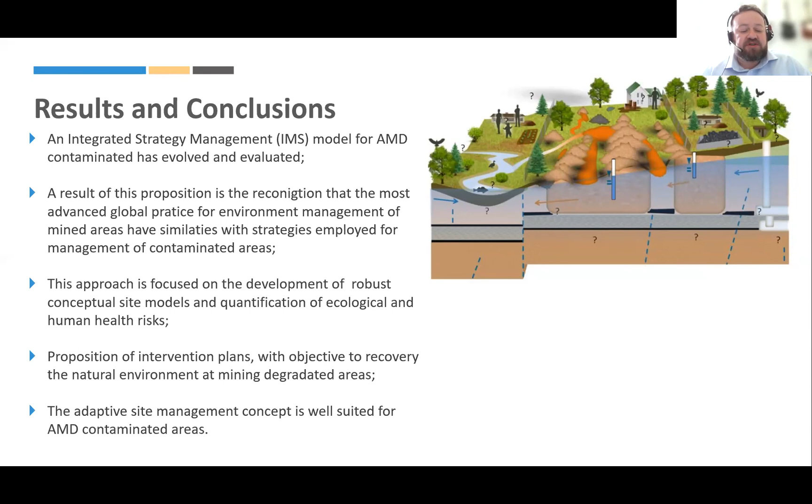It also recognizes that the adaptive site management concept is well suited for acid mining drainage contaminated areas to reach the objective of the intervention plan. So to finalize my presentation, I would like to thank Companhia Siderúrgica Nacional, my colleagues from USP, Professor Reginaldo Bertolo, and my colleague Sasha Tonhart, and Nicole Latin America as well.

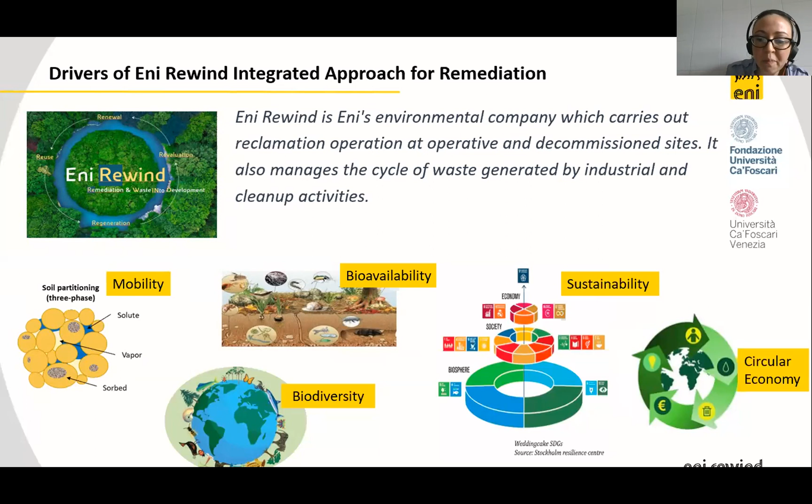In ecologically sensitive areas, the contaminated site should not only be managed based on the observance of limit values set by law, but a multidisciplinary study should be applied, such as the ecological risk assessment, to evaluate the chemical contamination impacts on the ecological receptor, or the effect that the remediation activity could have on ecosystems. In Italy,

ecological risk assessment is not a legislative requirement, and we don't have national guidelines. Therefore, Eni Rewind has decided to develop a general guideline applicable to different environmental matrices in collaboration with Ca' Foscari University.

The starting point for this collaboration was the Eni Rewind experience on the management of Lake Maggiore sediments, where an ecological risk assessment was conducted in collaboration with different stakeholders, such as university, ISS, the Italian National Institute of Health, ISPRA, the Italian Institute for Environmental Protection and Research, and the Regional Agency for Environmental Protection, and CNR, the National Research Council.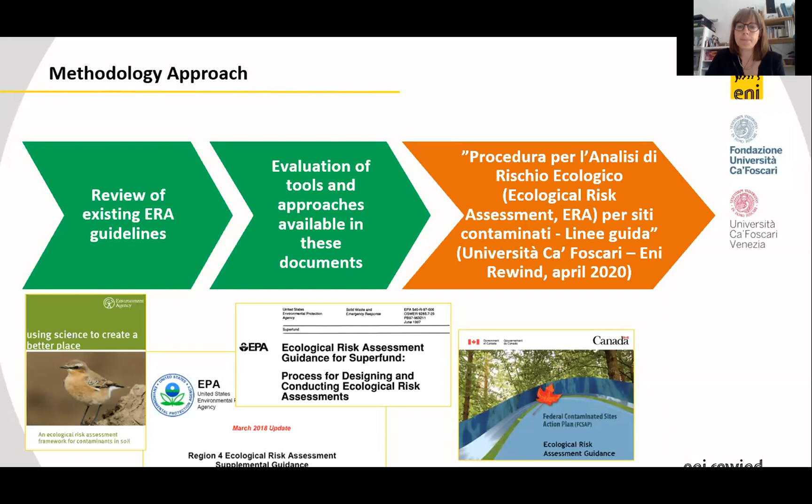According to the recommendation of existing guidelines, we adopted the typical framework for ecological risk assessment, which is composed of a problem formulation phase, followed by exposure and effect assessment, and finally by risk characterization, where the outcomes of previous steps are integrated and jointly evaluated to achieve a conclusion on the probability and magnitude of an ecological impact in the contaminated site. The result of this process is aimed at providing information for optimal risk management.

We decided to adopt a tiered approach, which is typically suggested both for human health and ecological risk assessment. And we consider as well the weight of evidence approach as one of the leading methodologies, because it allows us to evaluate multiple sources of information and to achieve more robust conclusions on the risk assessment.

So I cannot go through all the guidelines in detail, so I will try to give you a taste of what we have included in these guidelines.

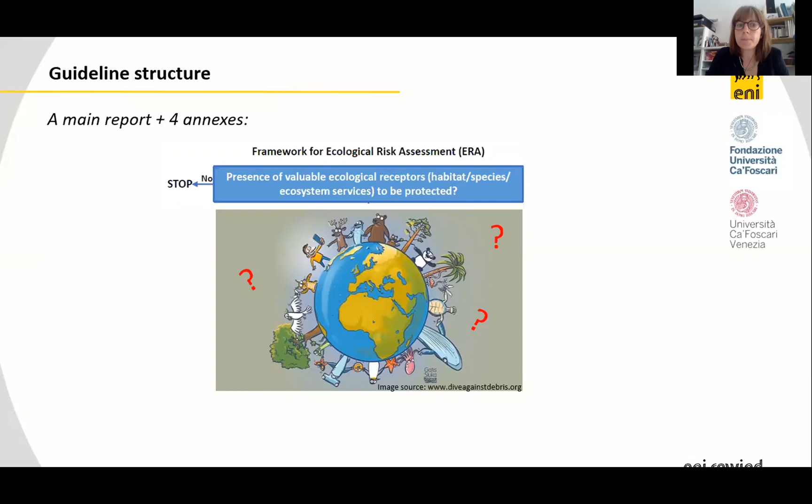The guidelines consist of a main report and 4 annexes, developed with the idea of providing a risk assessor with practical tools to support the implementation of ecological risk assessment. The main report describes the framework we proposed for ecological risk assessment, starting from the evaluation of the presence of valuable ecological receptors to be protected at the site. Ecological receptors could consist of habitat, fragile habitat, species including rare species, or also ecosystem services.

In case these receptors are identified, the risk assessor should proceed with the review of existing information about the site, identify at least preliminarily the relevant exposure pathway, and based on the information, develop a conceptual site model. The final aim of this step, the problem formulation step, is to assess whether there is a relevant link between contamination and receptors.

This can be found in the main text of our guidelines and in Annex 1. In this step, it's necessary to identify the protection goals. The risk assessor should select measurement and assessment endpoints, as well as lines of evidence to be evaluated and investigated. In this phase, it's also necessary to develop a sampling and analysis plan.

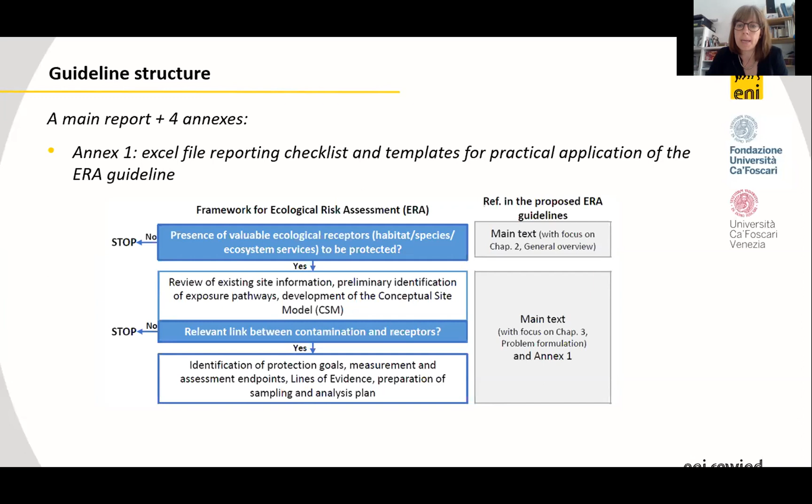So once the problem formulation step is concluded, it's time to proceed to the exposure and effect assessment, and then to integrate the results into risk characterization.

According to a tiered approach, as a first tier, we can have a screening ecological risk assessment, where the existing data can be evaluated against protective screening values. In this tier, data gaps and uncertainties should also be identified so that they can be better investigated in a further assessment.

So the final question of the first tier risk assessment is whether there are any potential ecological risks. In case this risk has been identified for at least some receptor, we should move to a tier 2 ecological risk assessment, which is a detailed assessment foreseeing the refinement of the previously identified conceptual site model, as well as site-specific investigation, or for example the identification and development of site-specific toxicity reference values.

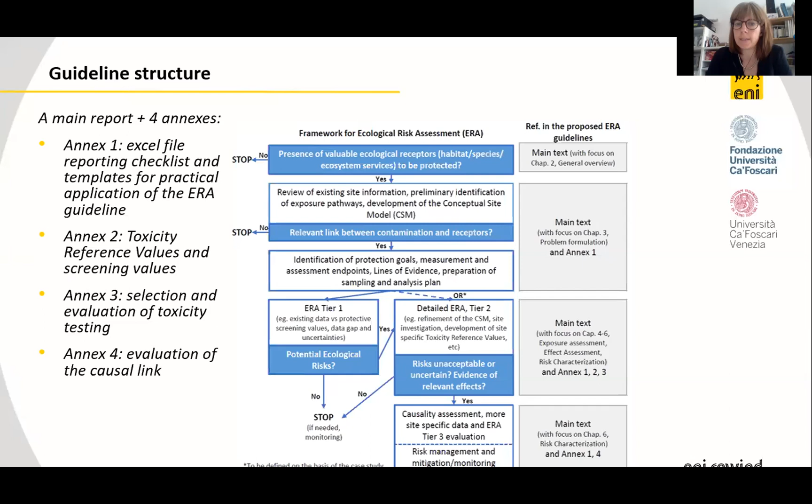As in any type of assessment, many questions can arise during the assessment. The risk assessors face many doubts and questions about the relevant information to be included, how to identify data gaps, or how to measure, for example in the case of ecological risk assessment, specific effects or endpoints, and which are the best tests to obtain this answer.

So to support the practical implementation of an ecological risk assessment, we decided to include in the guidelines a set of annexes which have the practical goal of guiding the assessors in the different steps. So I will give you just some examples.

In Annex 1, for example, we have included a list of tables like checklists and templates. For example, Table 4 is a template for the identification of exposure pathways for aquatic ecosystems, and on the right side of the table you can see which steps this tool can be used for. In this case, it's for the problem formulation step.

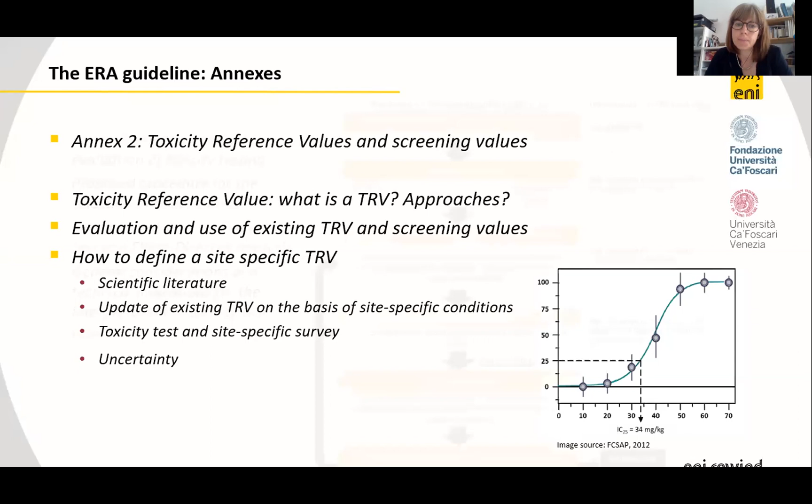In Annex 3, we propose a framework to guide the selection and evaluation of toxicity testing, of ecotoxicological tests, based on the assessment goal, site-specific condition, and target receptor. This annex also includes general considerations and indications for the interpretation of toxicity test results, which is always a very critical step in ecological risk assessment. Finally, in the last annex, we have included

indications on how to evaluate the causal link between contamination and ecological effects. There is a framework with all the tasks to be performed, starting from the listing of all possible causes of effects, then an explanation of the available methods for evaluating the causal link in experimental design and field investigations, for example, on how to identify confounding factors. There is a suggestion for approaches for data analysis, and finally some recommendations on how to implement weight of evidence approaches, so how to evaluate and integrate information coming from different lines of evidence, like chemistry, ecotoxicity, and ecological surveys.

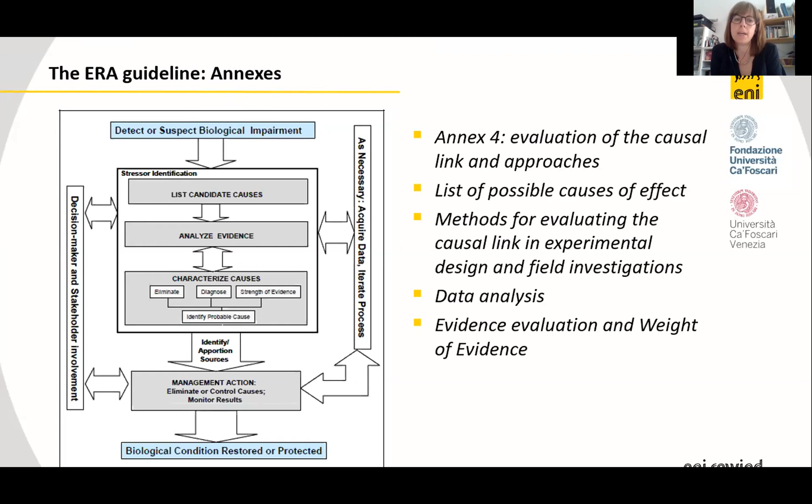So in conclusion, in our vision, the application of these guidelines could suitably support the management of contaminated sites where an ecological value has been identified. And the aim is to find a balance between environmental protection and more effective remediation strategy.

The proposed guidelines are currently being tested on two Eni Rewind sites where the contamination is potentially affecting different matrices, so that we can test the proposed approach on different environmental matrices, in particular in the cases at hand we're dealing with sediment and soil contamination. Our objective is to test these guidelines and identify possible weaknesses in the procedure, so that we can finalize the guidelines and finally disseminate them

at the national level. As a possible roadmap for the future, the final aim is to share these guidelines with the main stakeholders in the remediation sector, especially with environmental national authorities, and to look for the endorsement of stakeholders so that it will be possible to regulate the ecological risk assessment and find a place for it in the national regulatory context. Of course, this is quite ambitious, but we hope that this work could represent a useful step in this direction.

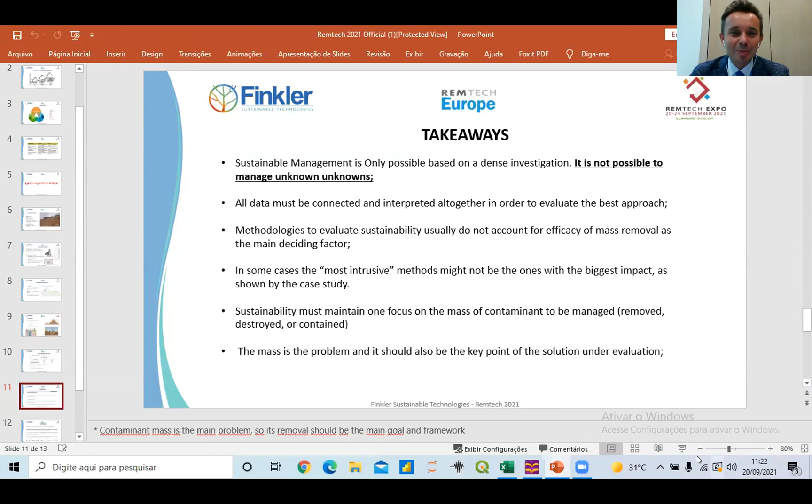Yes, so the takeaways from my presentation were that if you have a really good understanding of the distribution of our contamination, you can more effectively remove it. And in some cases, as the study case showed, the most intrusive method might be considered sustainable if you consider the entire project life cycle. So the sustainable approaches, metrics, guides, and analysis should also take into consideration the whole project and not only specific parts, and therefore focus on the fact that the mass is the problem, and it should be a key point for the solution and its evaluation.

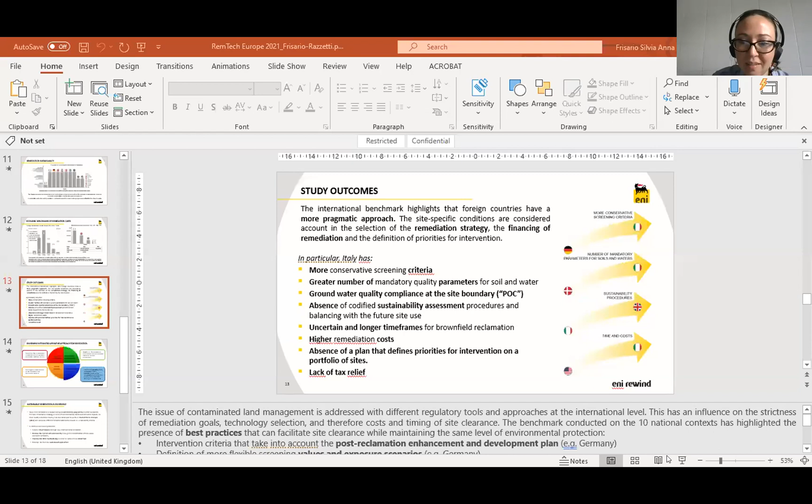The outcomes of the comparative study show that the management of contaminated sites is addressed with different approaches and tools at international level. This has an influence on the definition of the cleanup goal, on the technology selection, and therefore on cost and time of the remediation activities.

In particular, in Italy, we have the most conservative approach compared to other European and non-European countries, and we don't have a procedure to implement sustainable remediation. This means that the time and costs in Italy are higher than in the other countries we have studied and analyzed. But in any event, we are trying to include sustainability aspects in our activities.

We are developing several tools to evaluate the remediation strategy according to sustainability and circular economy criteria. Here we have the three main tools we are developing: a tool to evaluate the remediation strategy, a tool to implement a simplified life cycle assessment for remediation technologies, and a procedure to implement cost-benefit analysis for very complex sites and remediation strategies.

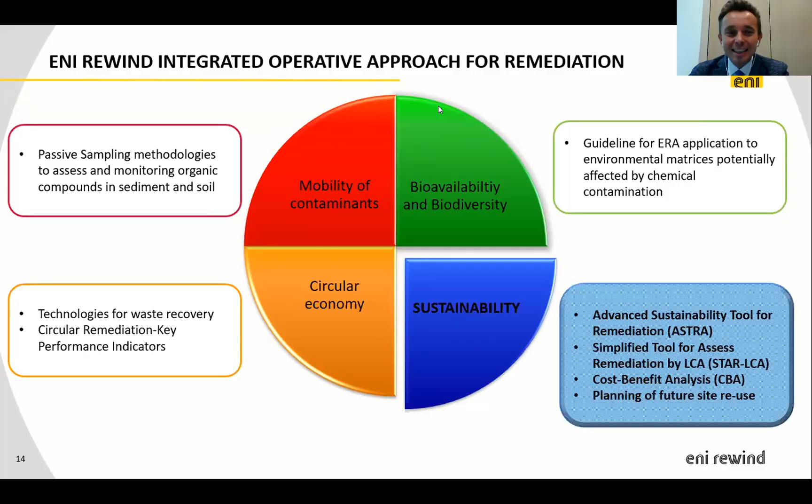There's a question for Silvia: you mentioned passive sampling for monitoring mobility in the soil, but what tools are suggested or available to analyze and manage the adsorbed phase?

Okay, we can have the total concentration of contaminants by performing traditional characterization and investigation activities. But if we want to determine the mobile fraction which could pose risk to receptors, we now have to perform a human health risk assessment and use constants to transform this total concentration into a mobile fraction.

But using passive sampling, we can measure this mobile fraction directly, so we can obtain a cleanup goal that is less conservative, and so maybe the remediation activity could be easier, also considering the technology we have available. Sometimes it's difficult to reach these cleanup goals because they are calculated using the total concentration and not the mobile fraction. And the question is, what kind of tools do you have to measure this mobile fraction?